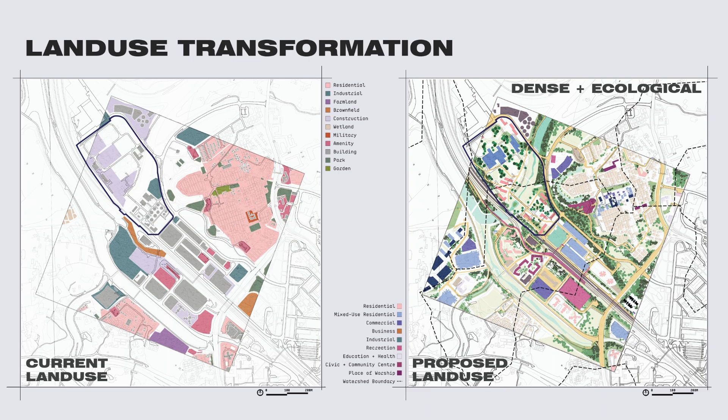With the estimated current population at 10,000 and the government master plan proposal increasing that number to 14,000, this proposal aims to accommodate a projected population density of 16,000 people per square kilometer, balancing urban expansion with environmental restoration. Each watershed boundary will have a 40% residential land use allocation, and my design site is located within 2 watershed boundaries, holding an estimate of 3,000 people.

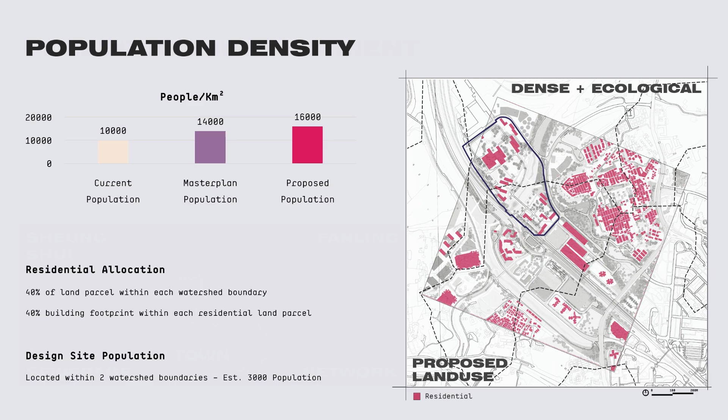Originally built in the 1980s, the Shek Wu Hui Sewage Treatment Works has undergone multiple expansions, including a 2015 plan to upgrade it into the Shek Wu Hui Effluent Polishing Plant, serving 300,000 residents in Sheung Shui and Fanling. Alongside the government plans, the site has potential to be redeveloped.

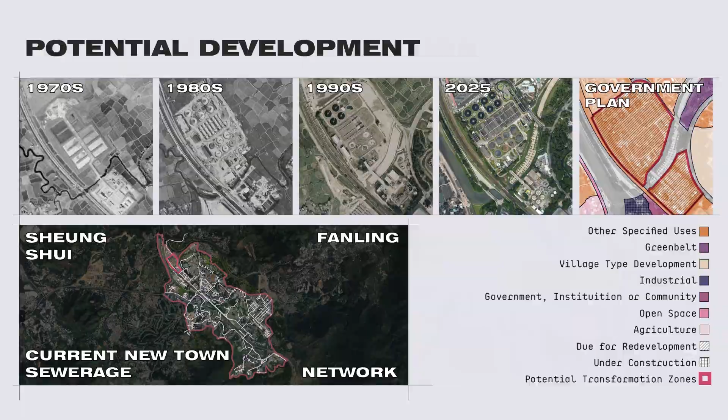Today, the site is one of several zones that contributes to ecological fragmentation, disrupting habitat connectivity between surrounding green spaces and further restricting biodiversity movement. Most areas are currently covered with urban green, which suggests that more habitats should be introduced to improve fragmentation through my site.

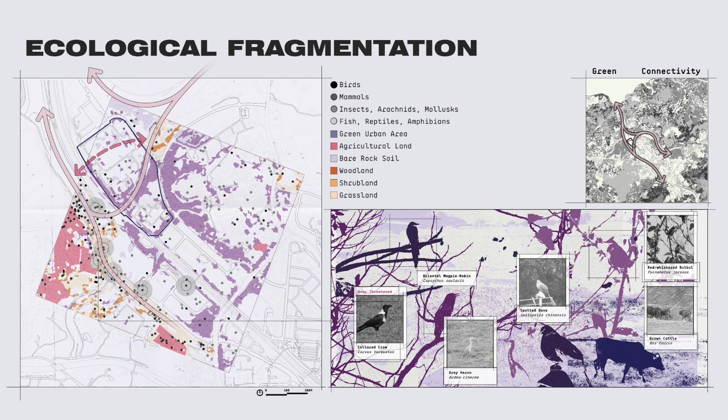Additionally, the site's existing highly impermeable industrial infrastructure has no spatial correlation with and disrupts natural water flows, weakening the watershed's ability to regulate stormwater and support ecological processes.

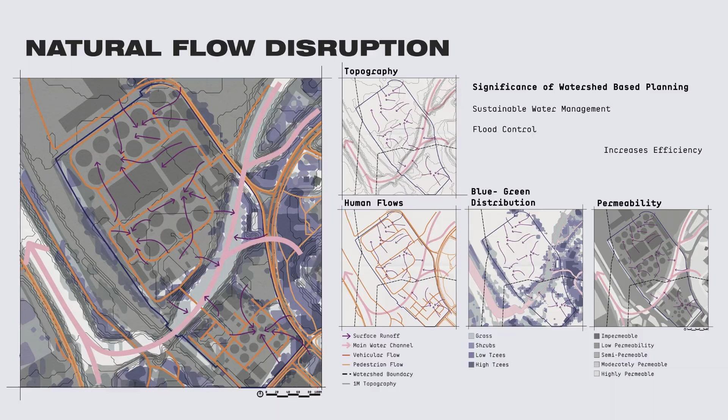By studying the existing sewage works' key infrastructure and processes of the sewage water, there is an opportunity to create and retrofit both infrastructure and systems to feed the needs of my project.

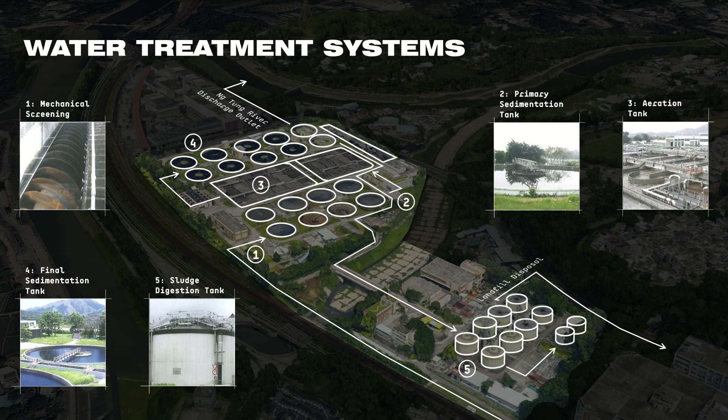This project aims to develop new hydrological networks as the backbone for this high-density neighborhood development. Key strategies include strategically positioning blue and green spaces to promote sustainable stormwater management, water recycling, and habitat enhancement.

Also, to repurpose existing infrastructure to fit current development demands, as well as to provide multifunctional open spaces for both human and nature. Finally, the design will accommodate the growth of nature and increasing population density over time through an incremental development plan.

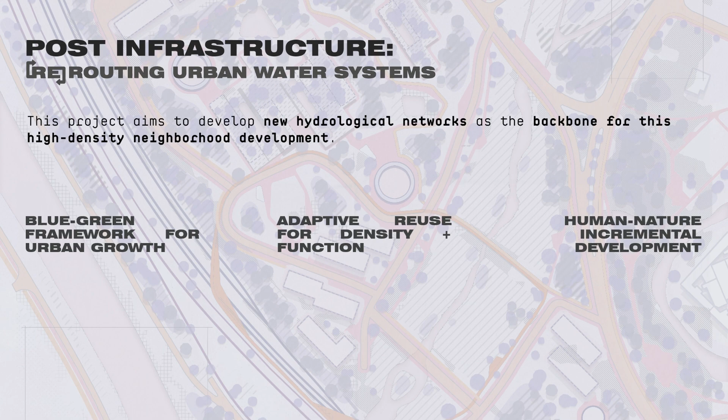For my first strategy, the development of my project starts with a nature-first approach, aligning both the blue and green distribution and human flows to natural watershed boundaries.

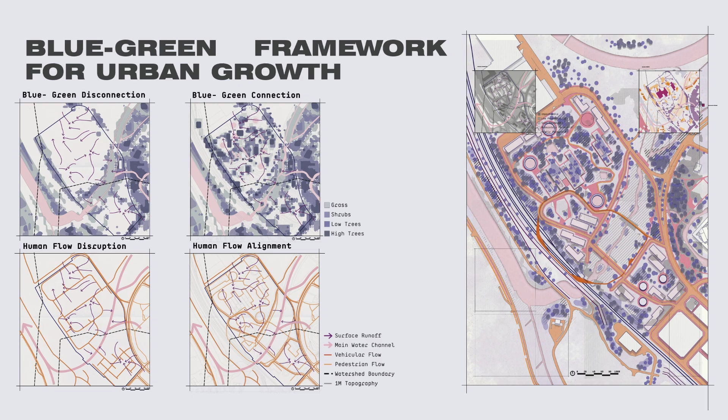Next, alongside the strategic placement of blue and green, this improves the permeability for water in low-lying areas on site. It also increases the type of habitats present, increasing the overall ecological value of the site.

Lastly, the current hydrological system of the sewage will be rerouted for stormwater, greywater, and black water to be circulated and reused within the new residential development.

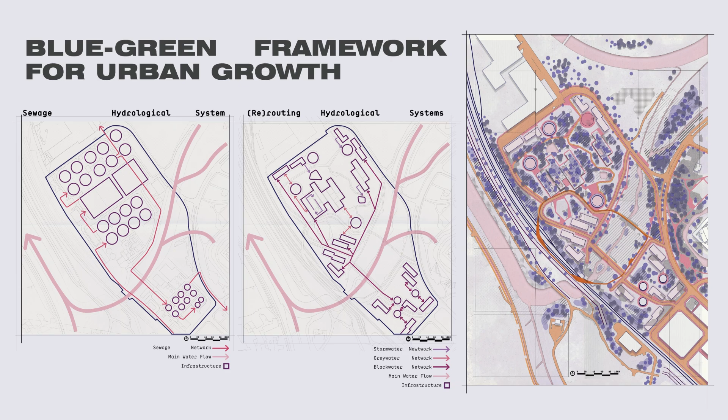My next strategy of adaptive reuse presents the opportunity to retrofit several key existing infrastructure to provide functions for both human and nature. This example shows the treatment and reuse of both stormwater and greywater to allow the existing sedimentation tanks to be used for both recreational pools as well as aquaponics, encouraging local food production.

By introducing community aquaponics, a new system that cleanses and reuses storm and greywater is circulated within the site.

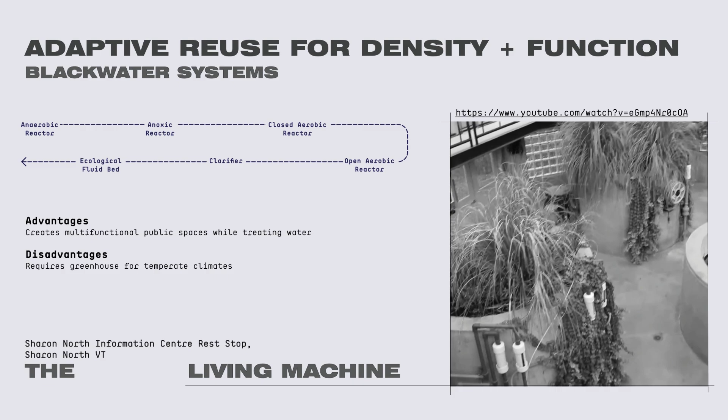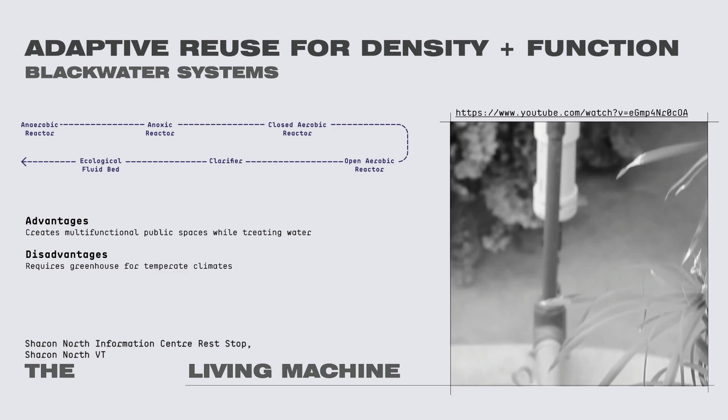For black water systems, I looked into the Living Machine system in Sharon North, which is ecologically capable of treating wastewater to high quality standards while providing multifunctional nature-integrated environments for the public. However, this system does require a greenhouse for more temperate climates.

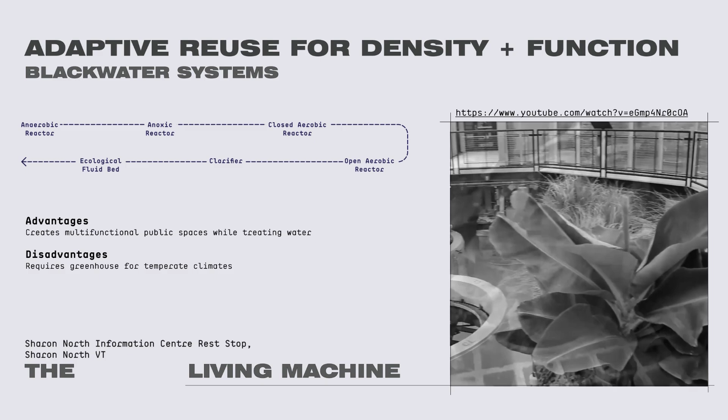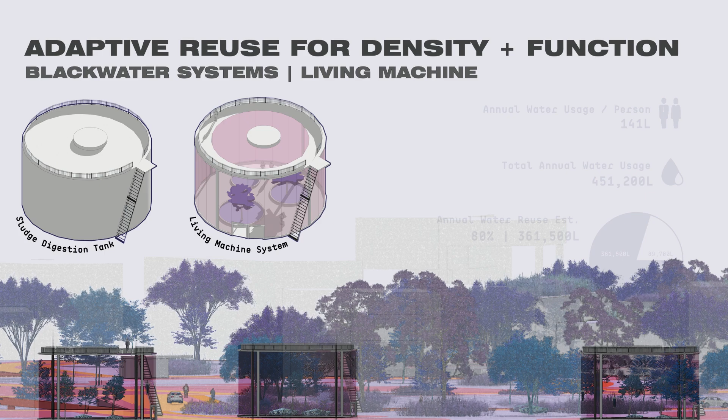This presents an opportunity for the existing sludge digestion tanks to be converted into living machines, treating wastewater within my site. Alongside the consideration of residential units that I will be proposing, these various storm, grey, and black water treatment systems on site can allow for an estimate of 80% of water on site to be reused annually.

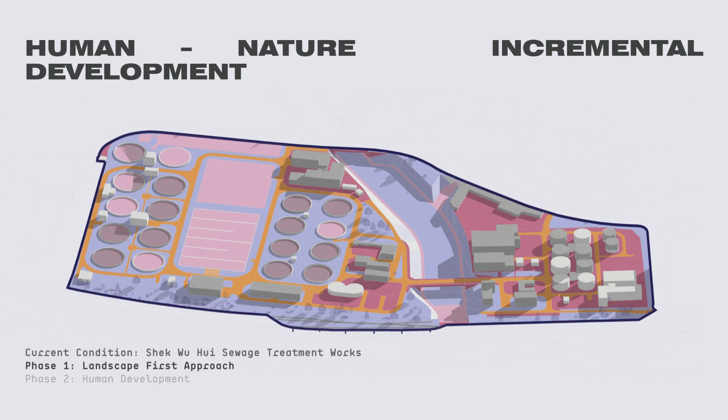My final strategy develops the first two strategies into an incremental plan, starting phase 1 with more landscape-first changes, firstly aligning human flows with natural boundaries.

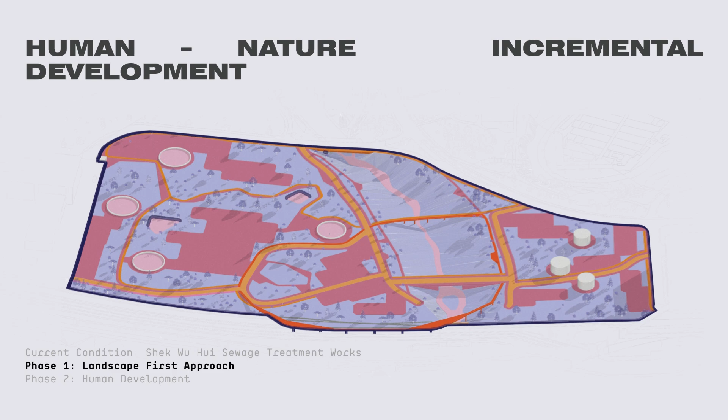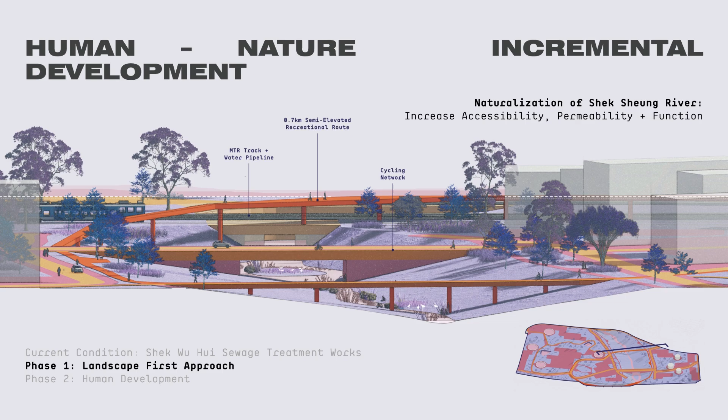The widening and naturalization of the Shek Sheung River that cuts through my site will increase accessibility, permeability, and function for humans.

The second and last phase then incorporates the human development aspect into the site, around the ecologically well-established site. New mixed-use residential models will also be implemented to improve and assist the connectivity of flora and fauna, not only around, but through infrastructure.

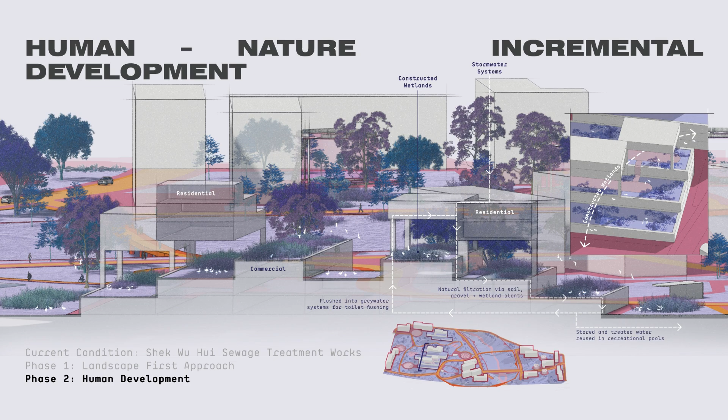Finally, my design will introduce 14 residential and 9 mixed-use developments, accommodating an estimated population of 3,200 people.

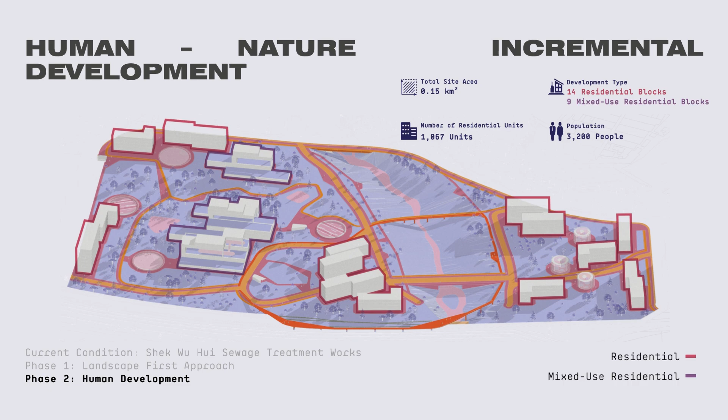To conclude, my design, Post-Infrastructure, reduces reliance on external water supply to create a self-sustaining, high-density neighborhood that reroutes urban water systems within and aligns with nature boundaries. Thank you.